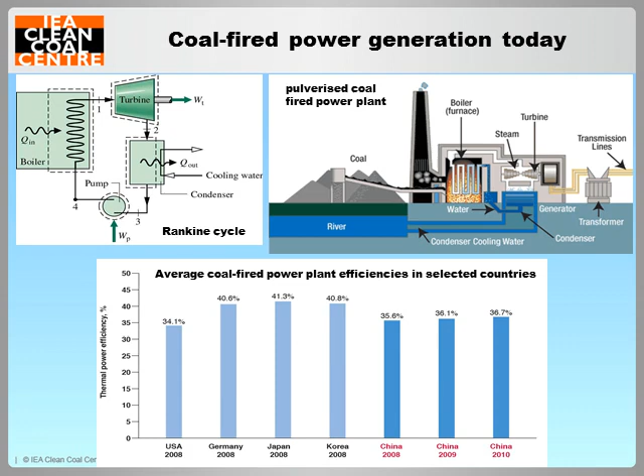The solid oxide fuel cell, SOFC, and the molten carbonate fuel cells, MCFC, are high-temperature fuel cells which offer the best opportunity for thermal integration with coal gasification systems. They also have fuel flexibility. They can operate on hydrogen, carbon monoxide, and hydrocarbon fuels, including coal-derived syngas and natural gas.

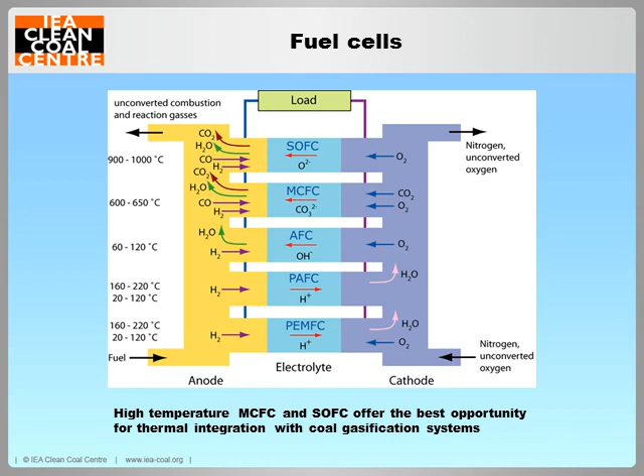Fuel cell power generation is an emerging technology. Gas-fueled fuel cell power plants are in commercial operation in many parts of the world. In February this year, the construction of the world's largest fuel cell power plant, the 58.8 megawatts Gyeonggi power plant in South Korea, was completed with plant efficiency of 47% and extremely low emissions and low water consumption.

Coal-fueled SOFC and MCFC systems for large baseload power plants are under development, and there's still some way to go before the first commercial coal-fueled fuel cell power plant can be built. Recently, progress has also been made in the development of direct carbon fuel cells that use solid fuel and can convert the chemical energy in carbon directly into electricity without the need for gasification.

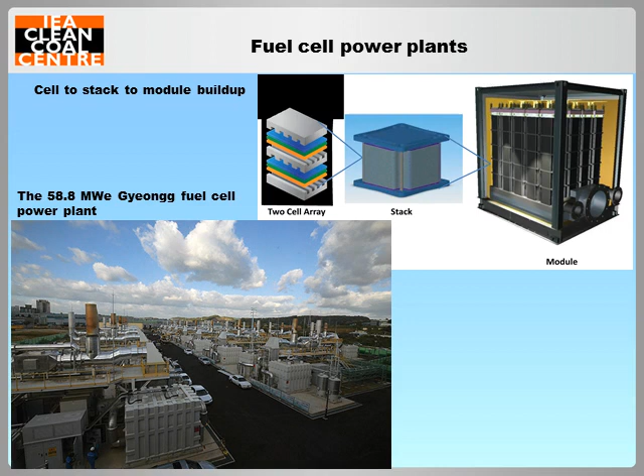Various power configurations integrating a coal gasifier with fuel cell power system are being developed and investigated. The proposed systems usually adopt the fuel cell steam combined cycle or fuel cell gas turbine and steam bottoming combined cycle.

Control of CO2 emissions from fuel cell power system is easy because the fuel and the air streams to the fuel cells are separate. Carbon enters the fuel cells, exits as CO2. The residue fuel in the anode off-gas can be burned in oxygen, producing a stream of CO2 and water ready for carbon capture.

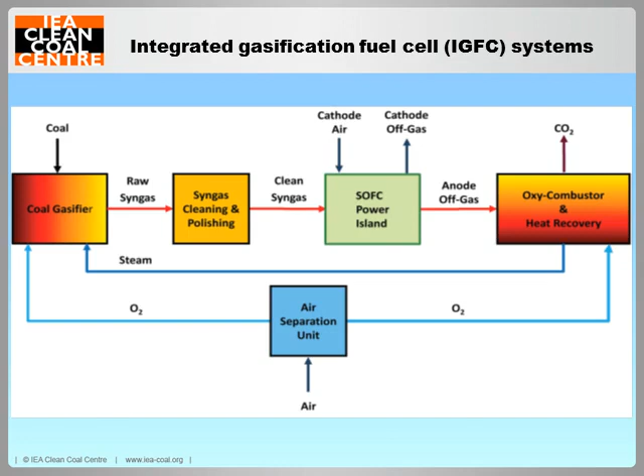Results from techno-economic analysis of the proposed IGFC systems all indicate that these systems can potentially achieve high energy efficiency up to 60% with almost complete carbon capture and low air emissions. The tables here show the results from one of such studies.

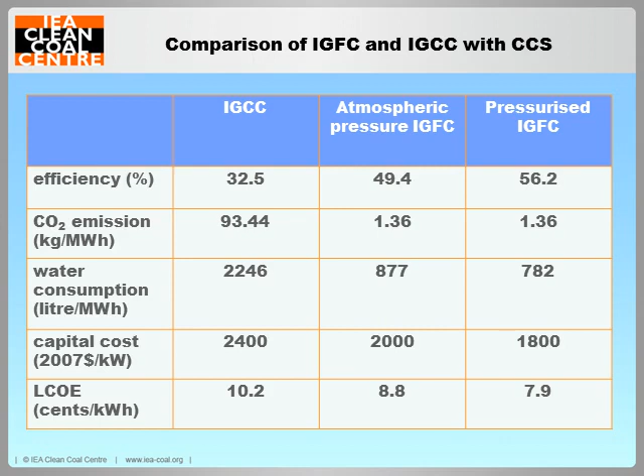In the open cycle MHD power system, combustion gas of fossil fuel is used as working fluid. In the closed cycle MHD system, seeded noble gas is used as working fluid, which is circulated in a closed loop and is heated by combustion gases using a heat exchanger.

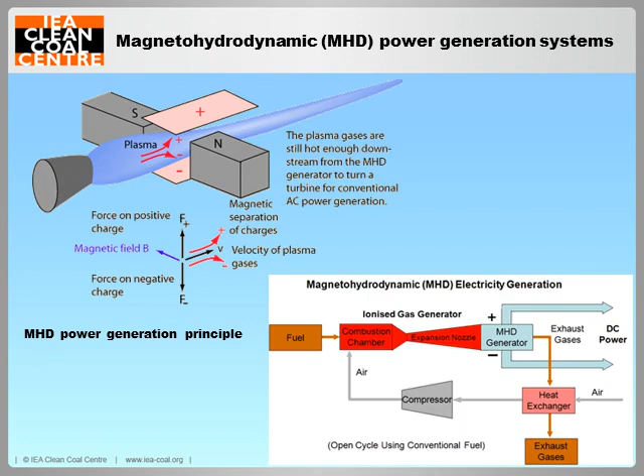Many system components were developed and tested, and the conceptual coal-fired MHD power plant designs were completed. Analysis indicated that MHD systems could achieve a plant efficiency of 45 to 55%, have good environmental performances, and would be compatible with carbon capture systems. The development of this technology reached the point where construction of a complete system was feasible.

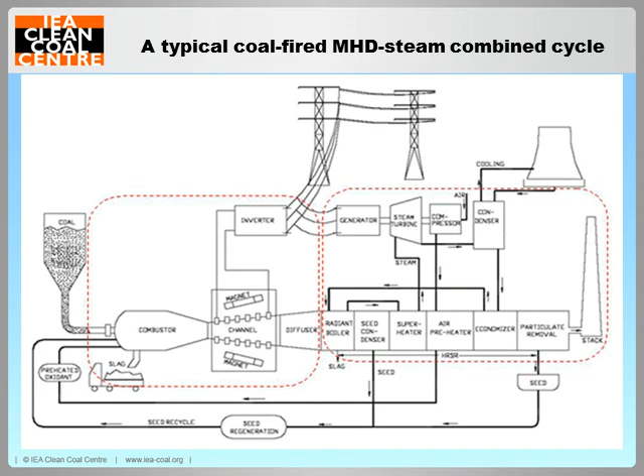The HIPPS that was under development in the US is the indirect coal-fired power system. Here, air is used as working fluid. Compressed air is heated in the coal-fired high-temperature advanced furnace, the HITAF, and is then expanded in the gas turbine to produce electricity. Either natural gas or a clean coal-derived fuel gas is used to boost the temperature of the air to the desired turbine inlet temperature. Heat is recovered from both coal-fired furnace flue gas and the gas turbine exhaust to drive a steam cycle to maximize power production.

Most components of the HIPPS power plant were already available. The only technology needed to be developed is the HITAF, including its air heaters, especially the heater located in the furnace radiation section.

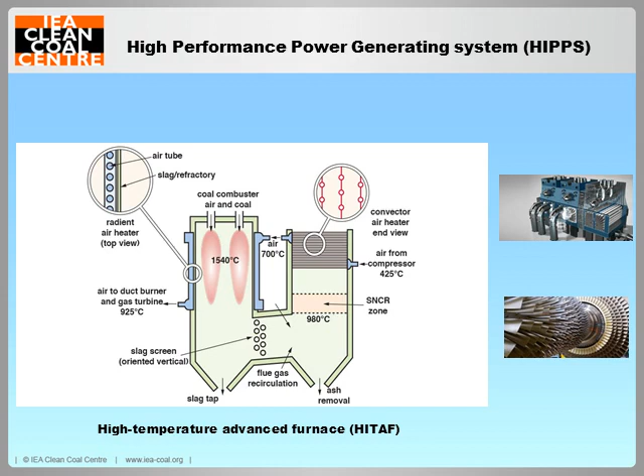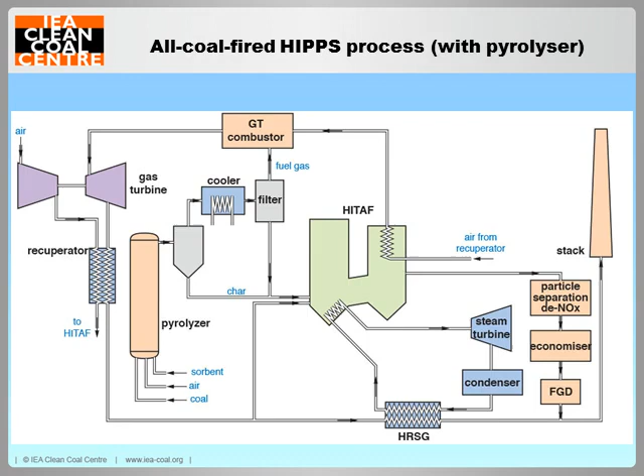Chemical looping combustion is an indirect form of combustion based on the transfer of oxygen from air to the fuel by means of a solid oxygen carrier that circulates between 2 interconnected fluidized bed reactors, the fuel and the air reactor. Its main advantage is that it produces a stream of CO2 and water ready for carbon capture. Another advantage is the possible flexibility to co-produce hydrogen or syngas and electricity.

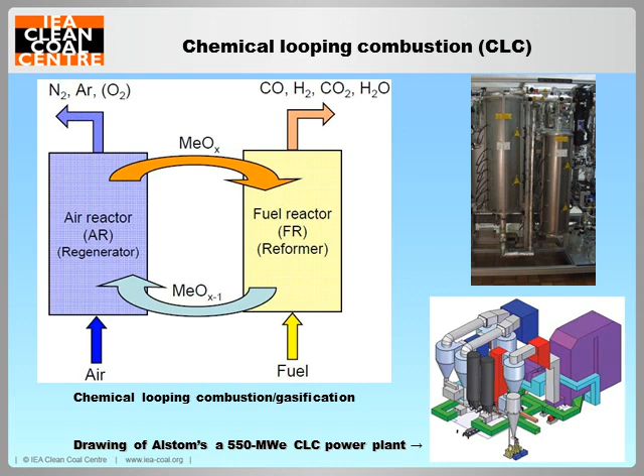Several CLC processes fueled by coal-derived syngas or by coal, as well as chemical looping coal gasification processes, are currently under development. Various CLC-based power plant configurations have been proposed and studied. The results show, compared with pulverized coal or oxy-pulverized coal combustion plants with carbon capture, chemical looping-based power plants could achieve higher efficiency, high carbon capture rate, with significantly lower energy penalty and lower costs.

Although CLC has attracted extensive research in recent years, and advances have been made, there are still a number of issues that require further investigation. For example, the development of oxygen carriers with high reactivity and stability is still one of the challenges for CLC.

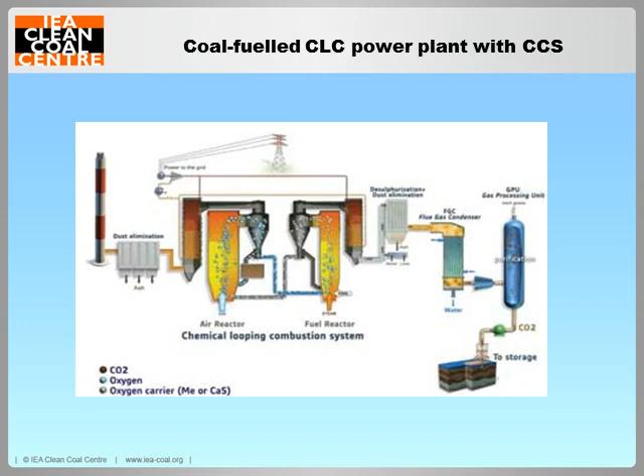There have been R&D activities seeking to replace the working fluid water with one that reduces the parasitic losses, or one that can obtain a better thermal match with the heat source. These works have led to the development of power cycles alternative to the steam Rankine cycle. The Kalina cycle uses a working fluid comprised of at least two components with different boiling points, typically water and ammonia. Since the solution boils over a range of temperatures as in distillation, more of the heat can be extracted from the source than with a pure working fluid.

ORC uses organic working fluid with low boiling temperature. The Goswami cycle is under development, and it uses a binary mixture to produce power and refrigeration simultaneously in one loop. All three cycles are developed to operate with low or medium temperature heat sources and can be integrated with the steam cycle as a bottoming cycle for improved efficiency. The Kalina cycle and ORC have found applications in areas such as waste heat recovery, geothermal, solar thermal, and biomass power plants.

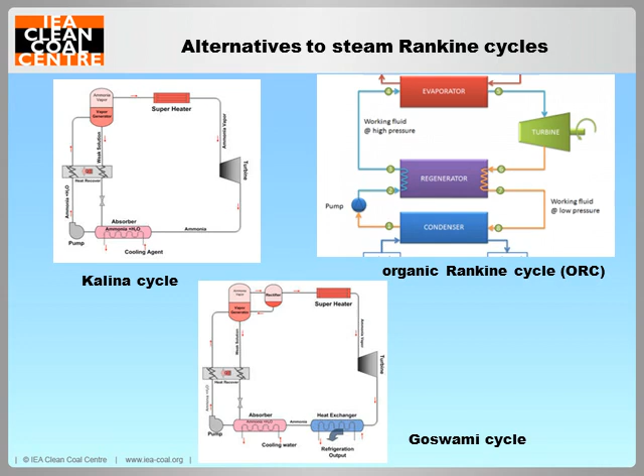Supercritical carbon dioxide power cycle is an innovative technology using supercritical CO2 as working fluid. CO2 has relatively low critical temperature and pressure, and can be compressed directly to its supercritical pressure and heated to its supercritical state before expansion, so as to obtain a better thermal match with the heat source. Supercritical CO2 cycle could potentially achieve higher thermal efficiency and has the potential to replace the Rankine cycle in both topping and bottoming cycle applications.

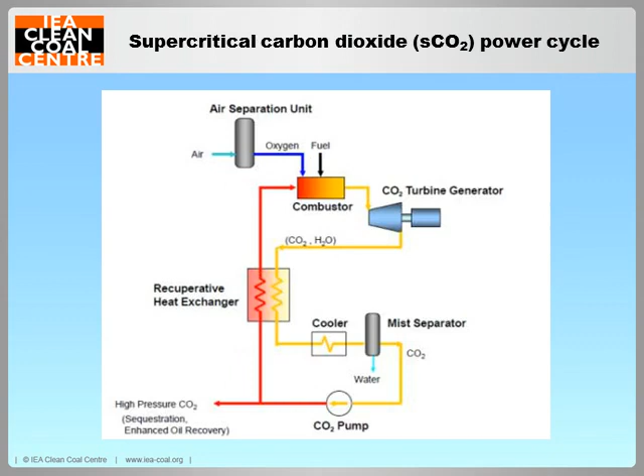Another advantage of a supercritical CO2 cycle is the extremely compact turbomachinery designs, as shown on the left in this slide, due to the high density of supercritical CO2. The closed-loop Brayton cycle using supercritical CO2 for power generation from coal is being investigated, but it is still in the early stage of development.

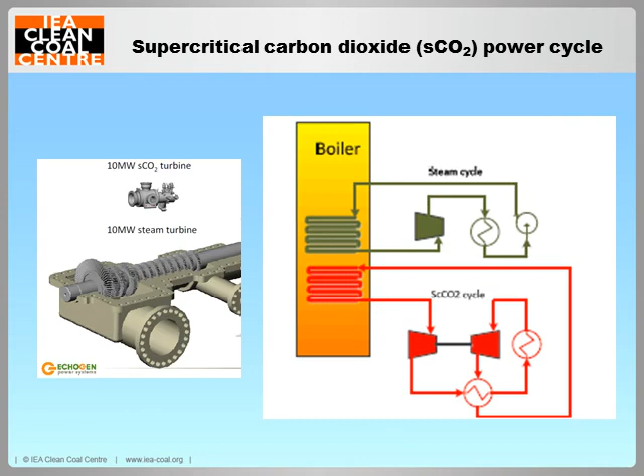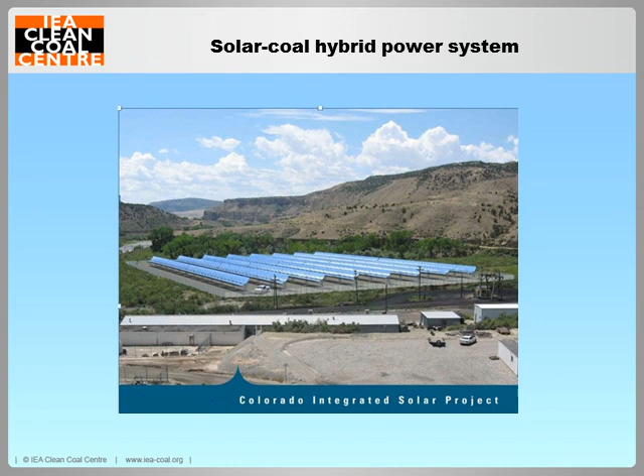The steam produced by solar thermal energy can be used to heat the boiler feed water, or after being further heated, to power the steam turbine to generate electricity. The solar thermal energy can also be used to preheat the combustion air. A few solar boost coal power projects have been carried out or are under construction at the moment.

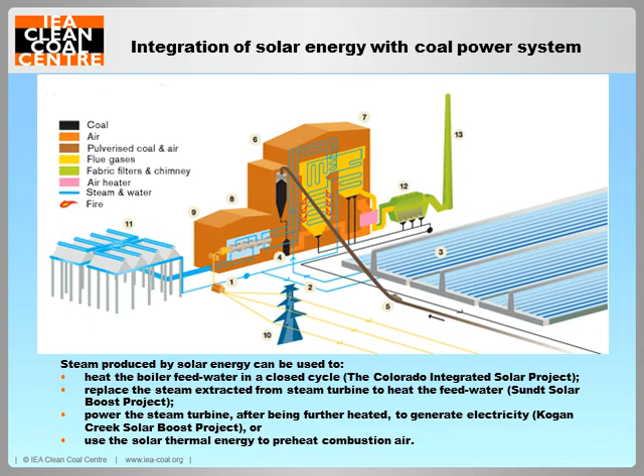In conclusion, coal will continue to play an important role in global power generation. The technologies for power generation systems alternative to the steam Rankine cycle are under development, and some have achieved significant progress in recent years. If these technologies can be developed into practical systems, they could ultimately have a significant impact on coal-based power generation. And I'll stop here.